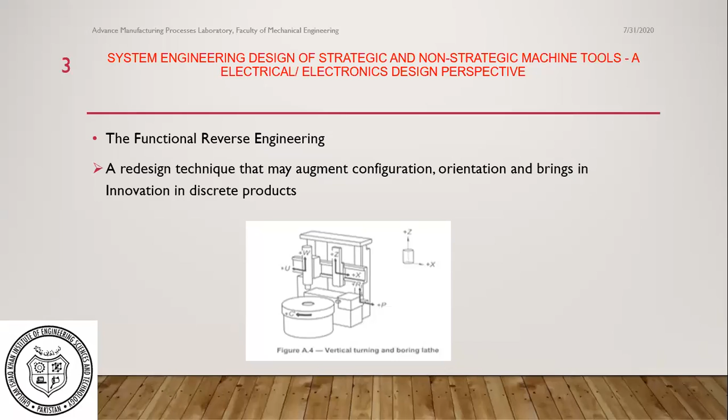I don't have time to explain all of these things in detail, but if you refer to the standard ISO 841-2001, you will be able to find the detail of how these particular things are explained. Next slide, please.

Okay, manufacturing is a complex science. According to Kalpakjian and Schmid, two professors from the USA, who have written two books on this particular topic, one related to manufacturing technology and the other related to manufacturing processes for processing different types of materials, there is a classification: forming processes, bulk deformation processes, and so on and so forth. I'm not going to read the list. You can read it yourself, and over here I will just give you some examples.

The machine that I just showed you, the vertical boring lathe, was one of the metal removal processes, which is a subtractive manufacturing tool in which we remove and subtract the material. In contrast to that, we have additive manufacturing processes, which is the current trend. In future, after 30, 40, 50 years, we are going to have all the manufacturing processes in the form of additive manufacturing.

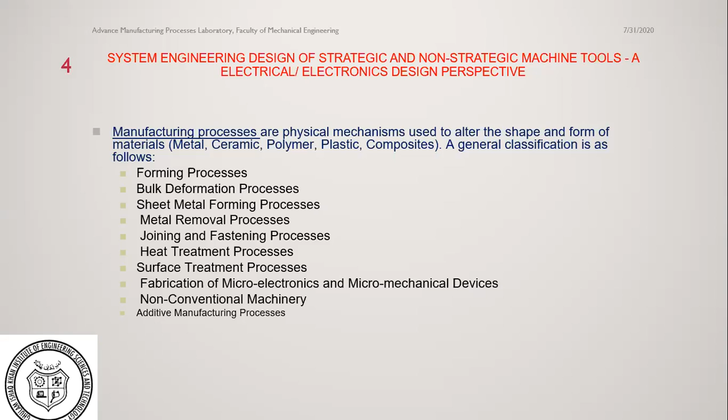Today, I'll show you an example of both metal removal processes, the subtractive manufacturing processes, and the additive manufacturing process. I'll show you what type of configuration they have, what type of orientation they have, how we can have the augmented reality of these things, how we can have the IIoT of these things, and so on and so forth. We are going to talk about it in detail in a while. Next slide, please.

Okay, just for a while, I have to shut down my video because one of the machines is being hidden by the picture. Okay, so I just switch off my video.

I was referring to this standard, ISO 841 2001E. This is the latest standard that you find about subtractive machine tools and different kinds of machine tools. I am showing you two machine tools. One of them is a parallel lathe and another one is a twin turret lathe with programmable tailstock.

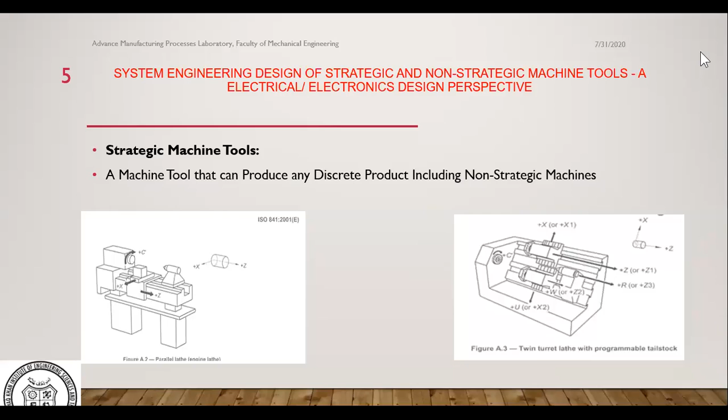Why am I showing it? The topic of the whole webinar is the system engineering design of strategic and non-strategic machine tools. So we have to define what is a strategic machine tool and what is a non-strategic machine tool. The strategic machine tool is basically a machine tool that can produce any discrete product, including non-strategic machines. The discrete product, again, is a new concept here. A discrete product is basically a product that can be counted. You can imagine that in the world there are billions of products that can be counted.

So I'm showing you here the two strategic machine tools, which can produce any discrete product, including non-strategic machines. Producing parts of them and assembling them, we get a non-strategic machine tool. Next slide, please.

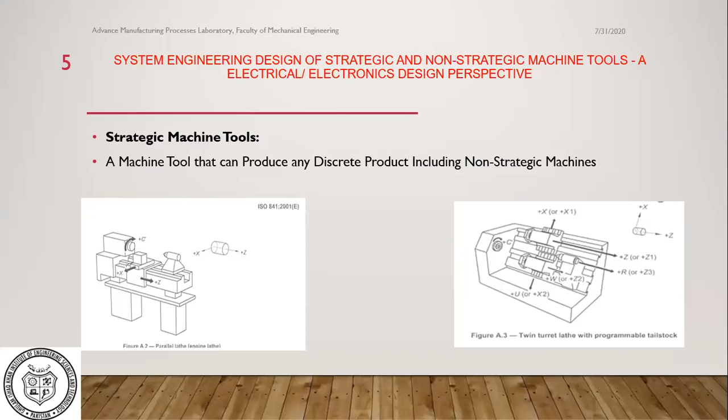Now, the components made here are basically from the manufacturing processes, the classification of which I have already given you in the earlier slide, which I have taken from Kalpakjian and Schmid. Most of them are basically subtractive manufacturing processes. So these are the machine tools which give you, for example, food. This machine also indirectly provides you food.

Similarly, you can have machines which are used for making shelter, for example, let me find you, a concrete mixing machine that helps in building shelter, the textile machinery used in apparel, and there are a number of other machines that can be used for other items. Next slide, please.

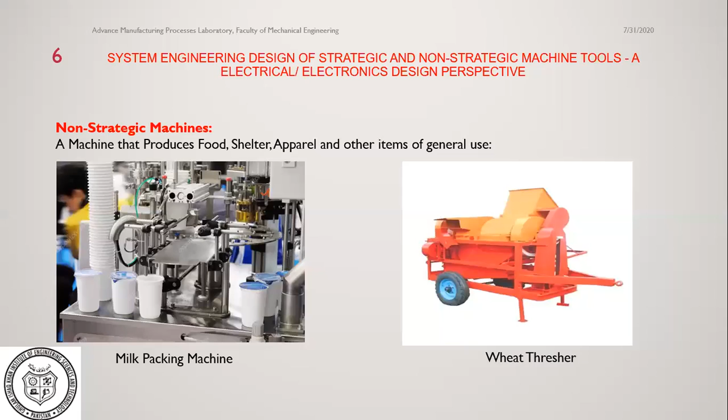Okay, what is system engineering design? We say in our topic, this is the system engineering design of strategic and non-strategic machine tools, electrical and electronic design perspective. Okay, now you know what is the strategic and non-strategic machine tools, and definitely we're going to talk about the electrical and electronic design perspective. But let's talk about, okay, what is the system engineering design?

Then there are certain features known as RAMS: reliability, availability, maintainability, and safety of the machine. These are the features that a machine tool must have. Then we have to have ergonomics of the machine, the man-machine interface, MMI, the HCI, the human-computer interface, and other parameters like where you place, for example on a wheat thresher, where would you be putting in any kind of sensor or transducer, and so on and so forth.

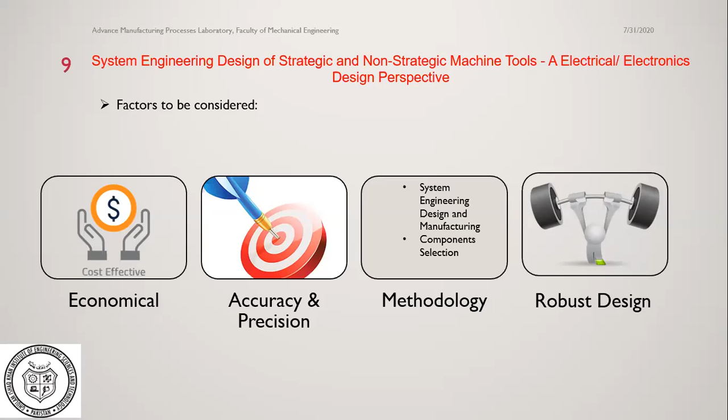Okay, my example today is an additive manufacturing process. Okay, it's called the electro-hydrodynamic jet process. You might not be aware of this machine. Okay, this is a research machine. Okay, it's not really manufactured widely in the world. Okay, it's a specialized machine because it produces a product that is used to do certain things which are sensitive in nature. Okay, and I will explain that in a minute.

Okay, which basically provides you a droplet on demand, or a continuous droplet of ink, and I will explain that in the next slide. Okay, next slide, please. Okay, the next slide is basically not the product, it's just the process flow diagram. Just please show the whole slide. Okay, continue, please. That's it. Okay.

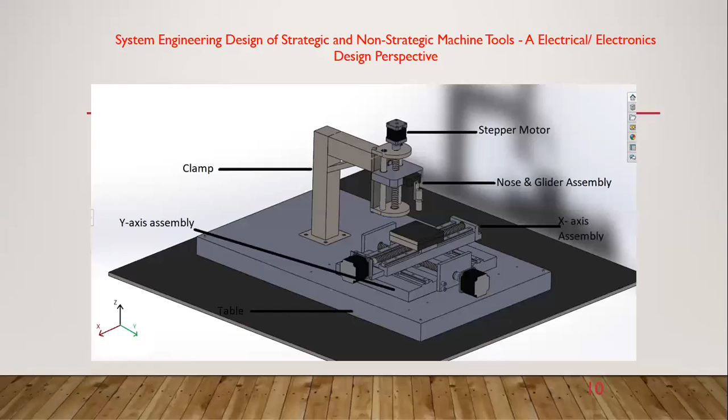Okay, well, this is the substrate table, okay, and this is the nozzle assembly, okay, and we are not showing any amplifier here. We are not showing any pressure generation. There is a high pressure assembly as well, which we are not showing. Okay, next slide, please.

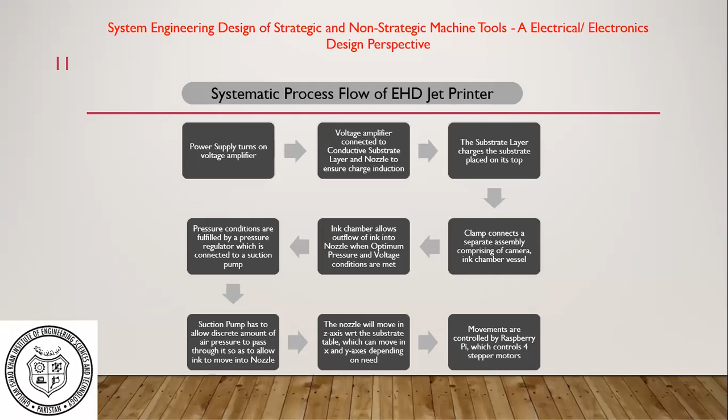There's a mention of a high voltage amplifier, there's a mention of a pressure regulator, there's a mention of a nozzle. Certain pressure is applied to it that causes the ink to flow in the form of droplets, or to flow in the form of a continuous flow. Okay, so what do we make out of it? Can we move to the next slide, please, so that we can see what we make out of it.

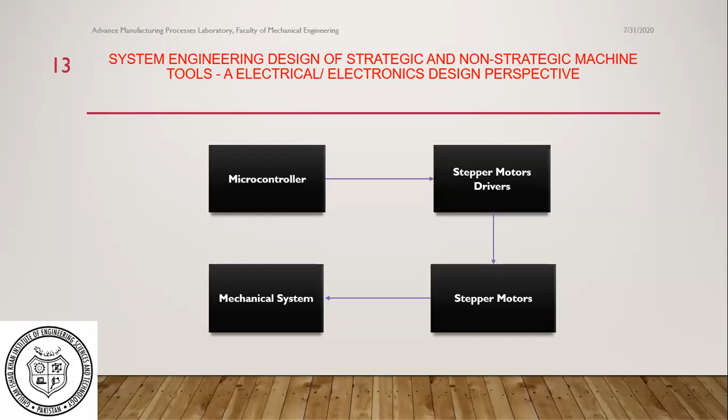Okay, we go on to the next thing. You have seen the structure of the motor, the process flow diagram, the product, the application. Now it is a simple thing for you. You have to use a microcontroller. You have to use a stepper motor driver. You have to have a stepper motor. It can be a different type of motor as well, a servo motor. Then there is a mechanical system that you have to rotate. Next slide, please.

It is NEMA standard motors that I'm talking about here. It can be other standards as well, not necessarily NEMA, but basically you're looking for NEMA 17, 23, 34, 42 type of machine. Now you must understand what I mean by configuration and orientation. Configuration basically gives you the structure of the machine, how the x-axis, y-axis and z-axis are placed, how the nozzle is placed, and the process flow diagram, the process itself, is slightly different.

If I had been in a classroom, I would have drawn it on a blackboard or whiteboard. But you have to understand this particular system very clearly. All engineers know, especially control engineering students understand it very well, that everything is basically an input process output methodology. Now we can also have embedded processes, one process embedded in another process.

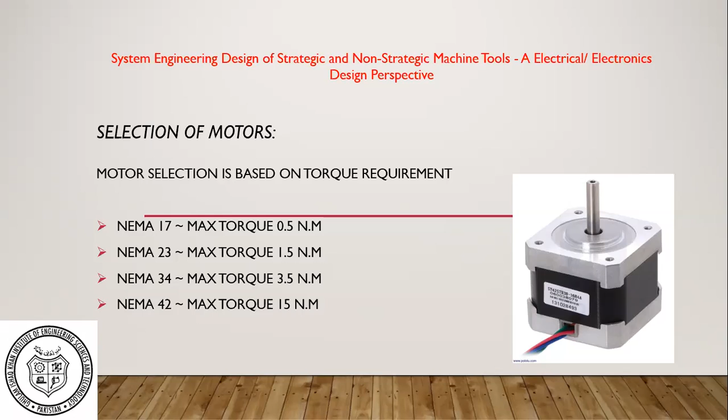Next slide, please. Drivers. I'm sure you understand that to drive a motor, you basically need a driver.

To run that motor, you need a driver. Okay, you have NEMA 17. It is 1.7 ampere per phase, and so on and so forth. The values are written in front of you. Okay, you can read it. Driver is selected based on current requirement of electric motor. Okay, this is the basic rule, and you have to basically match.

The comment that I have to make: basically, you have to match the specification sheets. Like the specification sheet of the NEMA motor, and then you have to match the specification of the drivers that are available. And the other thing, you might have to burn a few of the drivers before you get to the final stage, because you are not necessarily getting to perfection at the first stage.

And there are methods, basically the simulation done by Proteus and Multisim or other packages, which basically provide you the different types of values, which can lead you to select a particular driver. But again, if you're not careful, you are going to burn the driver. Okay, next slide, please.

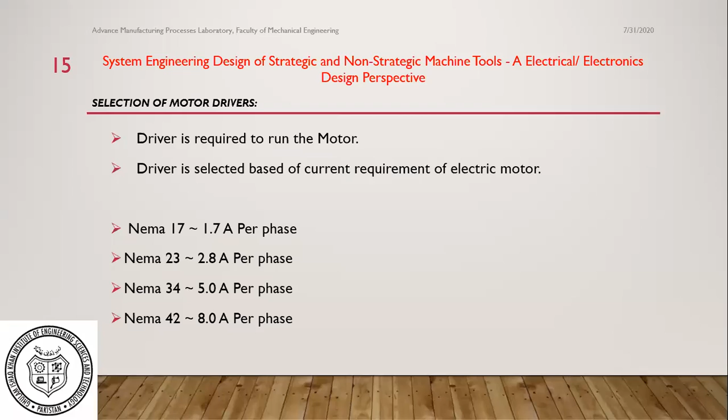Okay, the drivers, basically there are a number of drivers listed there. This is not all the drivers. The slide can fit in only 3 drivers. The details are basically given by them, and no mention of other types of motors. This is a simple thing: matching different kinds of specification sheets, a bit of electronic circuitry development using Multisim and these softwares, putting most of the time adding these particular drivers to those softwares and so on, and eventually trying to optimize the whole PCB. The next slide, please.

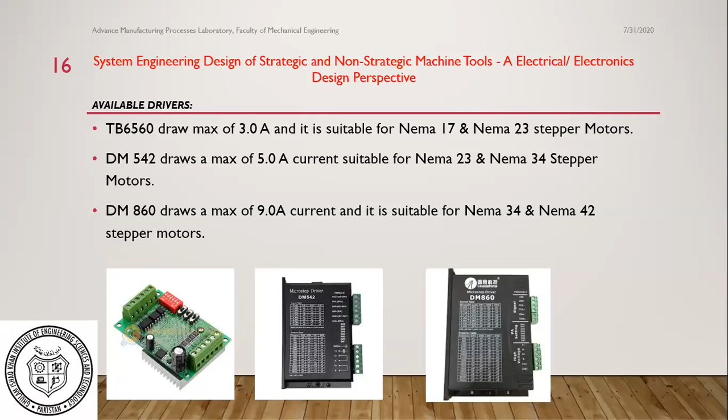Okay, the microcontrollers. The selection criteria of a microcontroller is based on how many input output lines you need, what kind of memory it has, and what kind of processes you can control using a particular microcontroller. Being an education institution, we have tried a number of microcontrollers. Next slide, please.

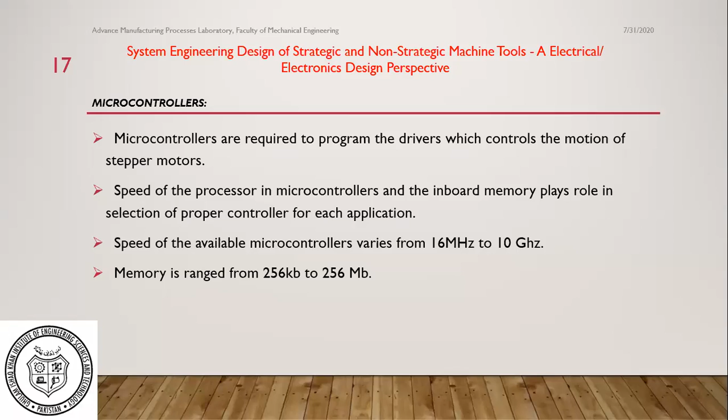Okay. A few of them are ATmega Arduino boards, Raspberry Pi, STM32, BeagleBone Black, Dragonboard, and so on and so forth. PIC is not mentioned here, for example, and there are other boards as well. You can always look into National Instruments cards too, which can provide you with some kind of functionality, and so on and so forth. Next slide, please.

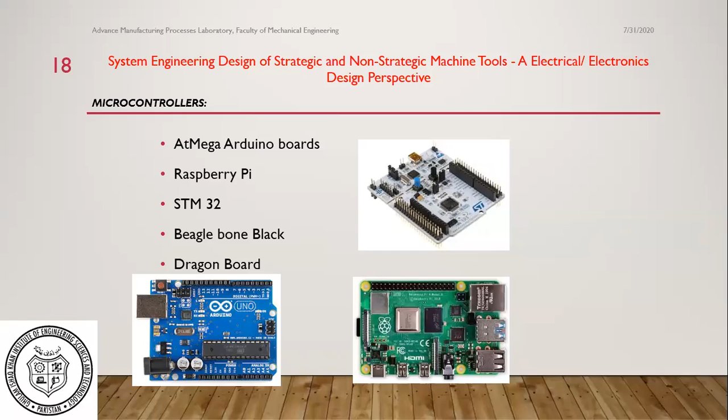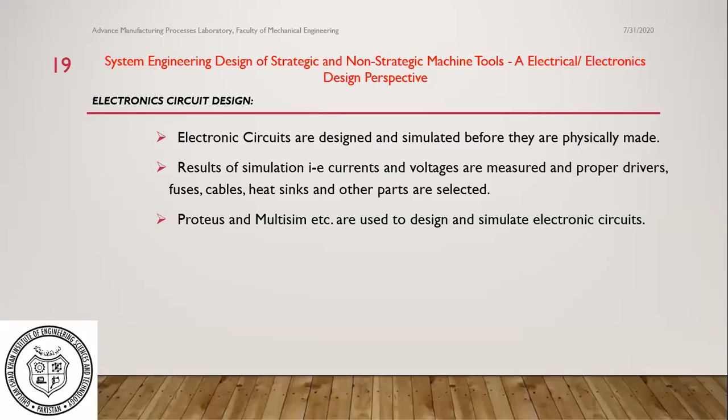This is the circuit for the EHD. There's not much, it is just for display. Next slide, please.

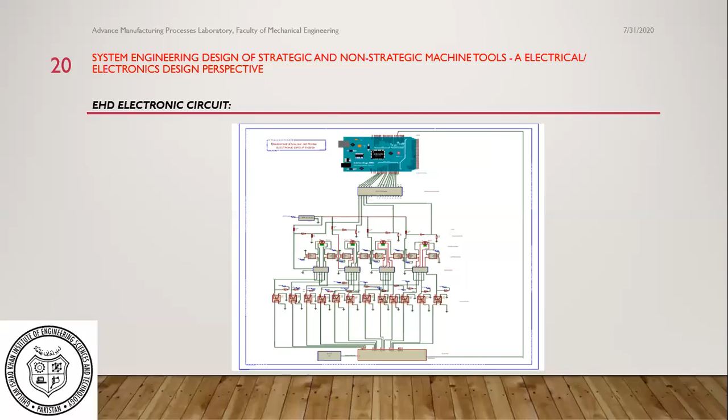Okay, the PCB design, that is the most important thing. Fritzing, Altium software, those also get involved. And we design the PCB. The cycle of production is the same as I described earlier, and you use those particular things. Next slide, please.

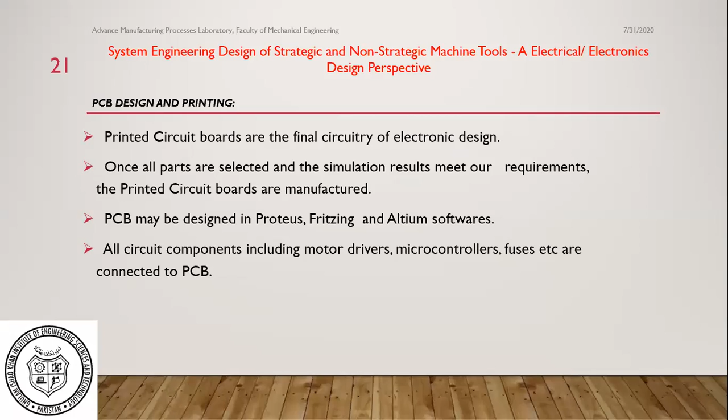Once you have developed the product, at every stage you have to perform certain types of quality control. Once you have a certain level of quality control, when the product is being produced normally, then you get into quality assurance. You don't check every single product. You check one after 10 products, or one after 20, or one after 30, and you continue with that. So this is important.

And once you have assembled the machine or the whole thing, you have to calibrate it. You have to make sure it is performing the function that was intended. It is giving you the efficiency. It is giving you the accuracy. It is giving you the factors I mentioned in an earlier slide. Next slide, please.

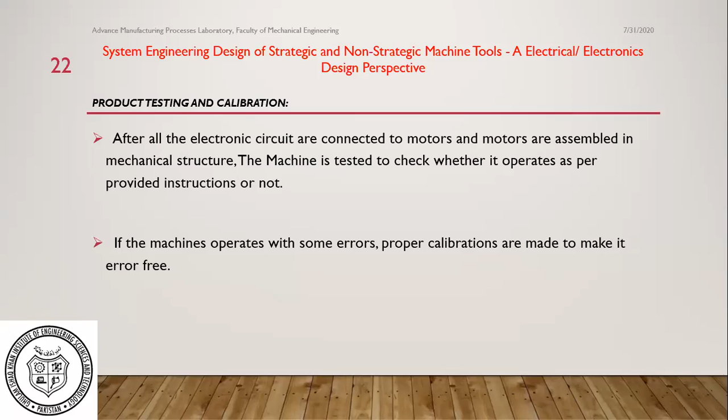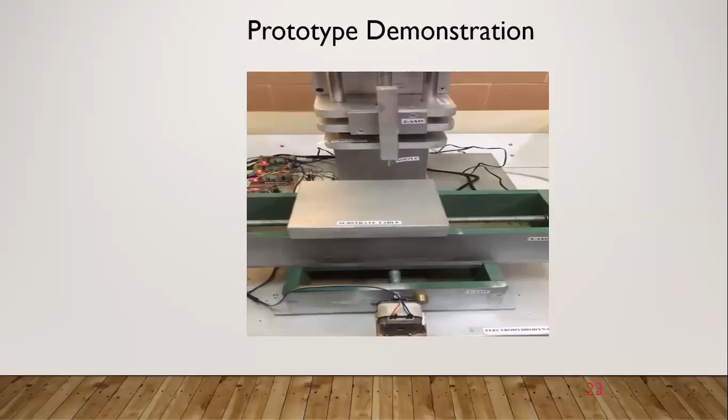Okay, please run the video. This is just a model of an electrohydrodynamic machine. I'll show you some machine from my own screen. This is the x-axis, this is the y-axis, this is the nozzle. This is just a model made in wood. The three motors that we talked about, the X, Y, and Z motors. There's no motor for the manual control of the nozzle and so on. Next slide. It's not much interesting.

I'll show you something interesting.

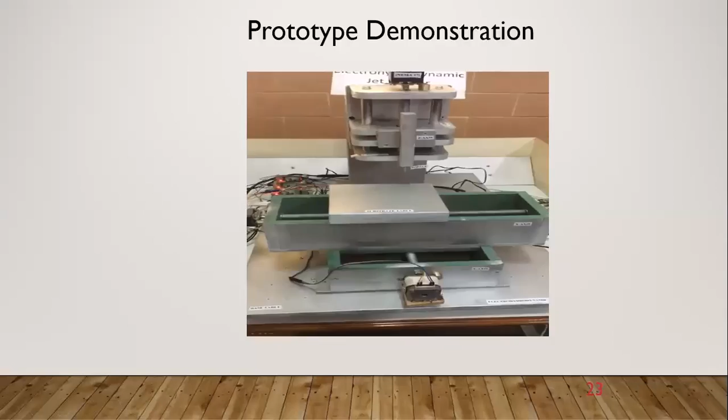The acknowledgements go to GIK Institute undergraduate, graduate, and postgraduate students, my co-investigator Dr. Ghulam Abbas, Dr. Ghulam Hussain, and Dr. Khalid Rahman, who specializes in additive manufacturing. This was basically his work that I was presenting. Of course, the GIK Institute of Engineering Sciences and Technology gives us the opportunity and liberty to work on these things. That is thanks to GIK Institute.

The Abbasin Techno is a place where I do some consultancy, and I'm going to show you some video sharing my screen that was developed there.

This whole grant, as I said earlier, is given by the federal government. We got around 100 million Pakistani rupees as a federal government intervention given to the government of Khyber Pakhtunkhwa, through the Directorate of Science and Technology, which we competitively won and are working on. Okay, next slide.